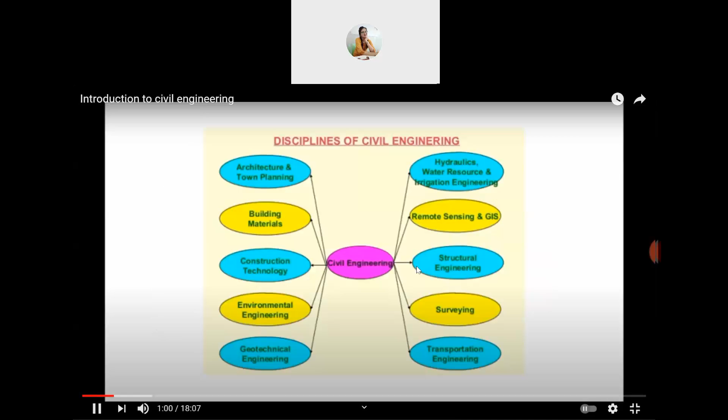These are the disciplines of civil engineering. The first one is architecture and town planning. What is the importance of architecture? Architecture gives beauty to buildings, enhances the appearance, and maintains heritage.

Town planning is now separated from civil engineering. Town planning includes planning the layout of the town, planning roads in different gridways, separating commercial, residential, academic and industrial areas, planning green belts, planning proper sewage and disposal units, and planning water treatment plants and water storage units. These are all included in town planning, which was once part of civil engineering but is now separated from it.

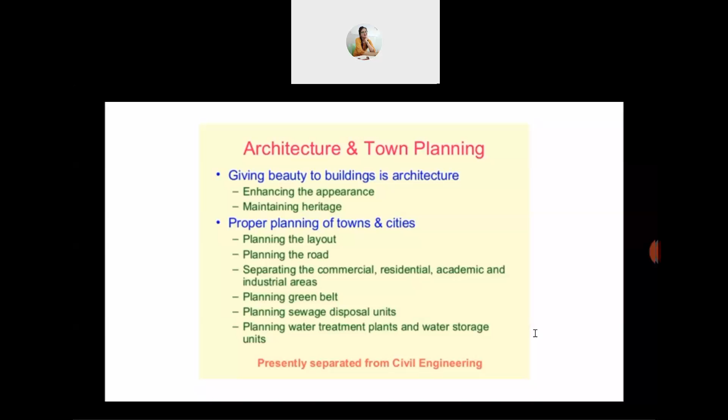Next is building materials and technology. What are building materials? They are the materials used for construction of buildings, such as bricks, tiles, soil, cement, stone, sand, steel, etc. These materials may be available naturally or be man-made. These days there are many new technologies and trends in the manufacturing process of building materials, and there are different varieties of building materials available today.

So what does building material technology deal with? It deals with the proper use of desired materials economically and safely. There are many materials available, but it's important to choose which one is desired, which is economical, and which is safe to use.

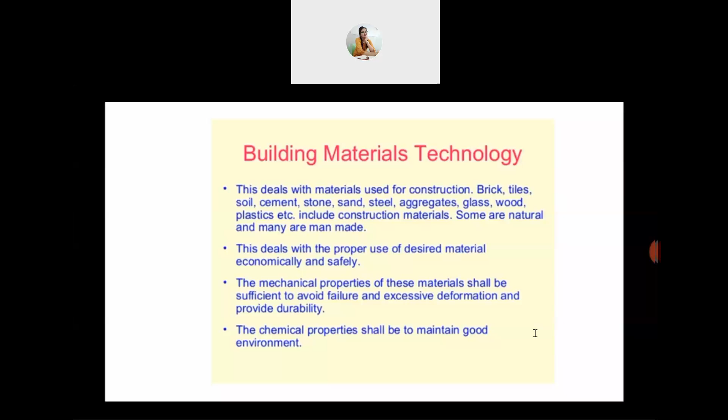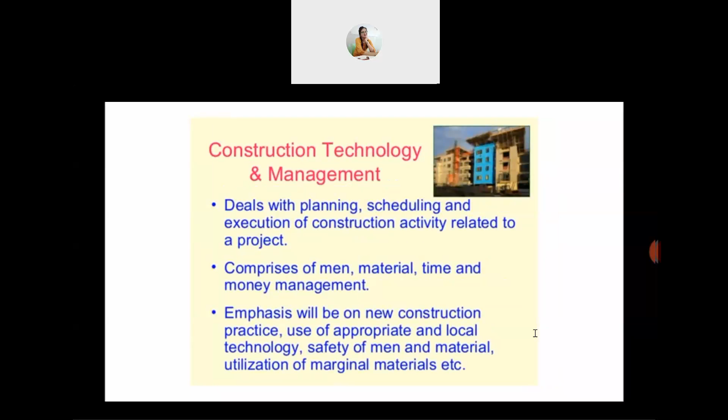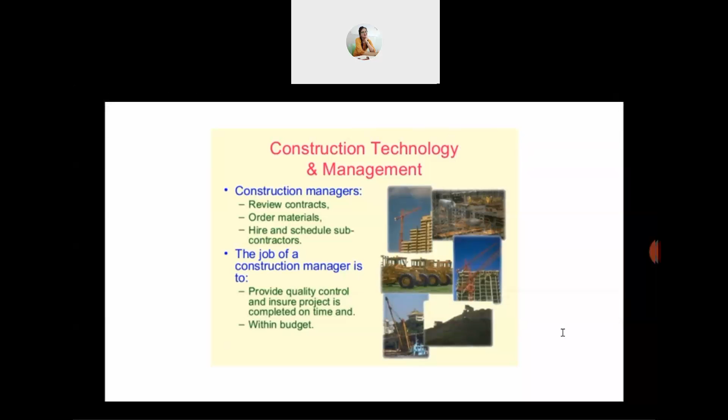Construction technology and management is a discipline that deals with planning, scheduling, and execution of construction activities related to a project. What exactly do construction managers do? They review contracts—a legal document—order materials, and hire and schedule sub-contractors. The job of a construction manager is to provide quality control and ensure the project is completed on time and within budget, since building materials should also be economical.

The next discipline is environmental engineering. Generally people think environmental engineering means the study of environment around us, but in civil engineering it actually deals with the technology to save nature from human and natural abuse and pollution. The study involves a balanced compromise between environment and safety.

It deals with the technique of water collection, purification, and supply—we need to supply drinking water that is potable. At the same time, wastewater collection: we need to collect waste from different buildings, whether commercial, industrial, or residential, and deal with how the waste is collected, treated, disposed of, or reused. It also deals with control of all types of pollution and solid waste management.

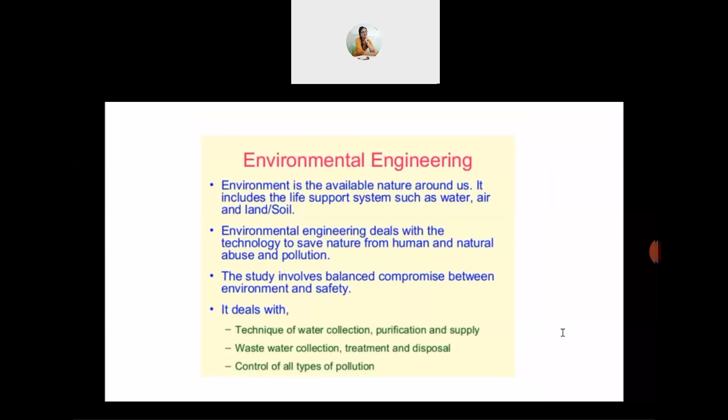So, environmentalist versus environmental engineer—these are different roles. The environmental engineer deals with the technique of water collection, purification, supply, wastewater collection, treatment, and disposal, whereas the environmentalist deals with all aspects of the environment.

Next discipline is geotechnical engineering. All structures are founded on ground, you know that. So what exactly geotechnical engineering involves is understanding the ground behavior, soil characteristics, and interaction between soil and structure. It involves foundations, slopes, retaining structures, highway pavement design, embankments, earth dams, tunnels, underground structures, etc.

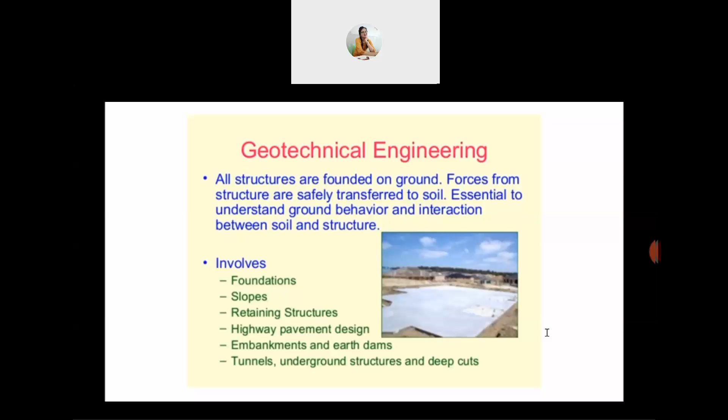So, do you know what exactly is a foundation? Foundation is a structure which takes the loads from superstructure and distributes them to the soil safely. It is a very important element of any structure. So in geotechnical engineering, we assess the quality of soil and rock to carry the structure. If the soil quality is not good, we either replace the soil or go for deep foundations. Proper knowledge of geotechnical engineering is very much necessary for safety and stability of structures.

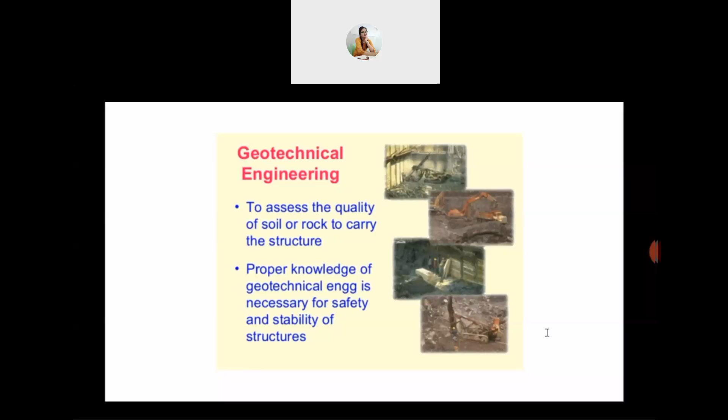Next is hydraulics, water resource and irrigation engineering. You know what is hydrology? Hydrology is the study of water. So what exactly does hydraulics deal with? Hydraulics deals with mechanics of water and fluid flow. Fluid may be water or any liquid.

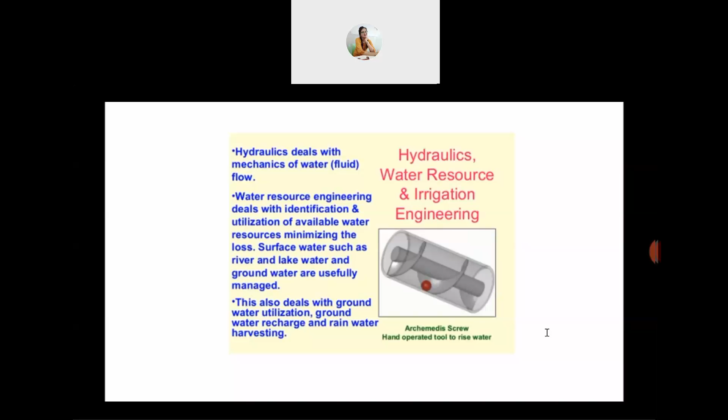So what exactly does water resource deal with? Water resource engineering deals with identification and utilization of available water. Irrigation, you know what irrigation engineering is? Engineering dealing with irrigation is called irrigation engineering. Groundwater utilization, groundwater recharge and rainwater harvesting all come under irrigation engineering.

Next is hydraulics, water resource and irrigation - this we have already discussed. Irrigation engineering deals with water management for agriculture purposes. There will be how water is distributed from the dam to the very field channel.

So what is a dam? Why are dams constructed? Where are dams constructed? Dams are constructed at desired locations to store water. We cannot construct a dam in between a town, right? We need to construct a dam where a river is flowing, and we need to store the water in a reservoir. We need to supply the same for drinking purposes, agricultural purposes, and many other water supply purposes.

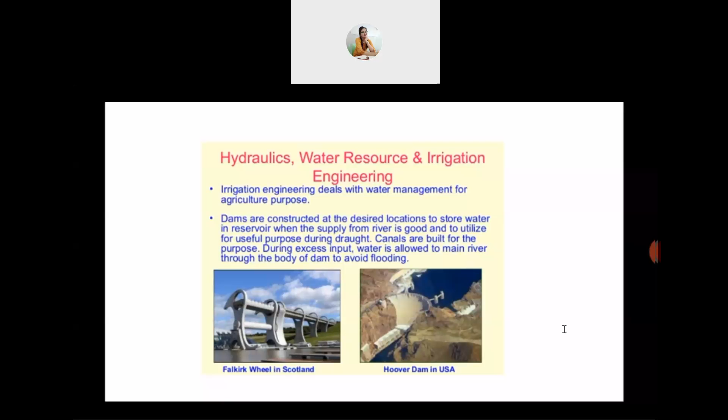So what exactly does water management involve? They deal with drainage systems, detention ponds, navigational waterways, etc.

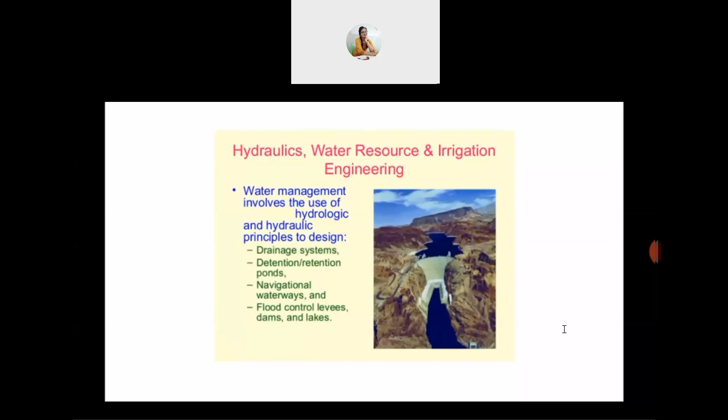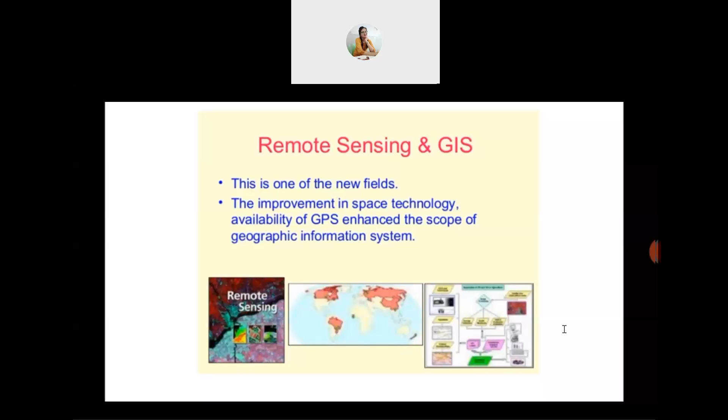Next is remote sensing and GIS. GIS is geographical information systems. These two are among the new fields. They deal with improvements in space technology - how we can collect data from space and satellites, how the data is collected from space, how it is processed, and how it is utilized by civil engineering. It all deals with the subject of remote sensing. So all the details I have given you in this slide.

Good mapping technique helps us to get required information accurately. You know what a map is? How it is useful? So all these things are included in this slide. Please go through this slide.

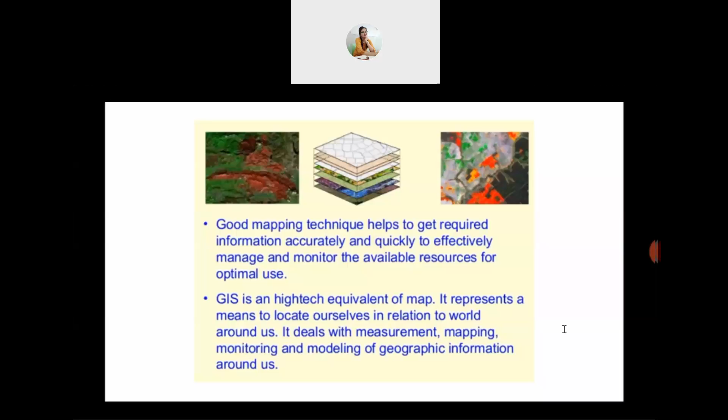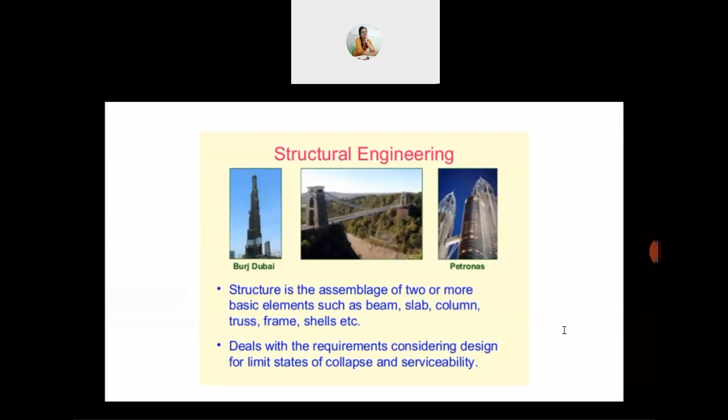Next discipline is structural engineering. What is a structure? A structure is a series of connected, interrelated elements that form together a system which can resist a series of external load effects applied to it.

Next discipline is surveying. Surveying in general is the art of determining relative positions of various points on the earth, above the earth, or below the earth. So what exactly do we do in surveying? We find the relative positions of various points. So how is it useful?

Surveying is useful in collection of data. So what kind of data do we collect? We collect data of topographic features of a location for future construction. They help us in preparing plans or maps in detail which may be used for construction purposes.

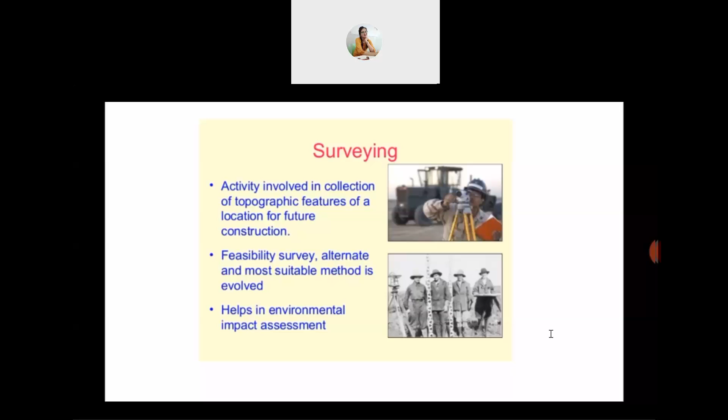Next is transportation engineering. So what exactly does transportation engineering deal with? It involves planning, designing, construction or operation, and maintenance of transportation facilities.

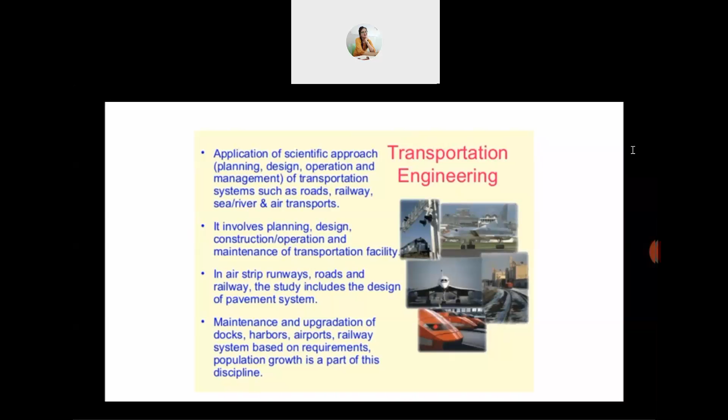So what is a road? You know what a road is, right? A road is an identifiable route, way or path between two or more places. Road is simply any pathway fit for riding.

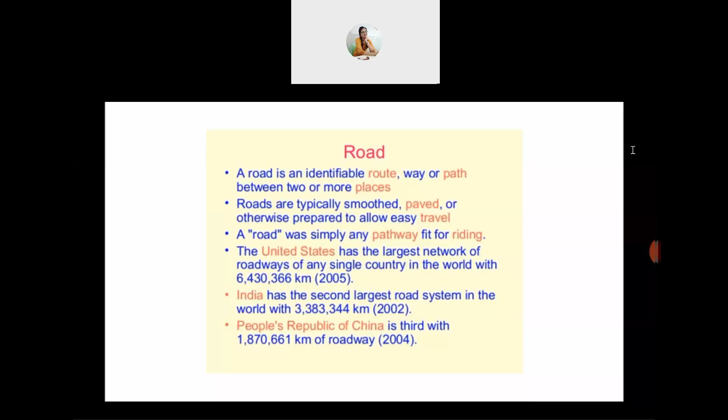Bridges - a bridge is a structure built to span. It is designed for trains, pedestrians, or road traffic, a pipeline, or a waterway for water transport or barge traffic.

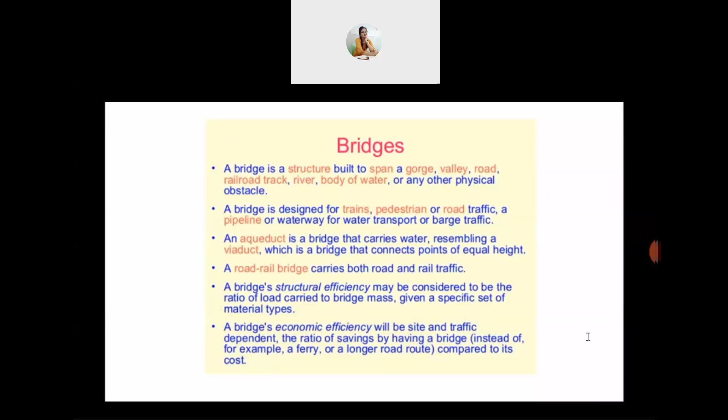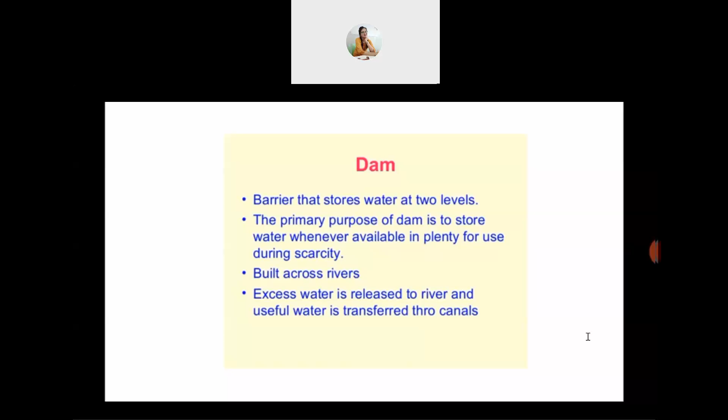Next is dam. You know what a dam is? I have already told you in my previous slides. Dam is a barrier that stores water at two levels. The primary purpose of a dam is to store water whenever available in plenty, for use during scarcity. That water can be used for drinking purposes, domestic purposes, and agricultural purposes.

Next discipline is infrastructure. So, do you know what exactly is infrastructure? Infrastructures are the structural elements that allow for the production of goods and services without themselves being part of the production process. Example: roads allow transportation of raw materials and finished products.

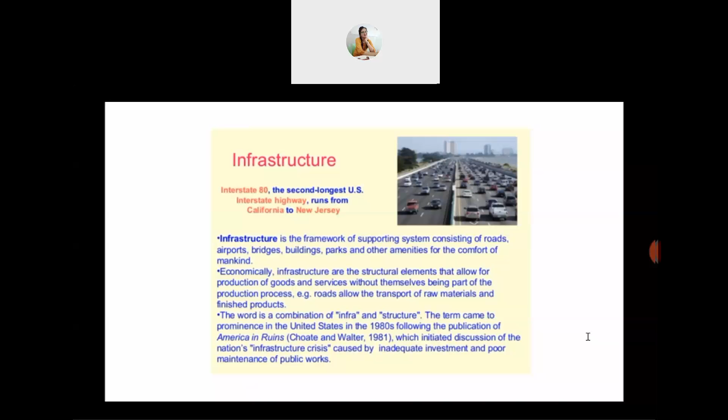So, what exactly infrastructure deals with is transportation. Transportation includes road network, railways, ports and harbors, air travel, and airports.

Second one is television network, which is also a means of communication. Telephone network includes landlines and mobile phones. Energy sector.

Electrification, use of renewable energy such as solar, wind, biogas plants. These are eco-friendly techniques.

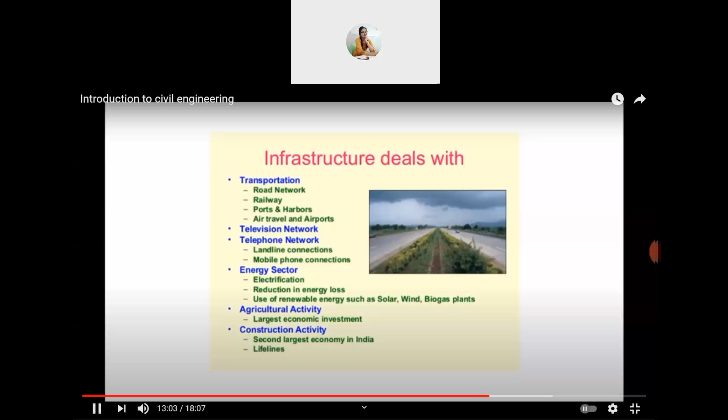So what exactly does a civil engineer do? He analyzes long range plans, survey reports, maps, and other data to plan and design projects. Without maps, we cannot plan or design projects. So he will collect all plans, survey reports, survey maps, and other data useful to plan and design projects.

He will also consider construction cost. I have already told you how cost plays an important role. For example, there are two bricks available: one costs 16 rupees and another costs 12 rupees. Which are you going to buy? When both give equal quality for the structure, definitely we'll go for lesser cost.

So he will be considering construction cost too, and we need to go for government regulations. There are many regulations given by the government which we need to follow. Potential environmental hazards—we cannot construct a building which will cause effect to the environment. So definitely we need to consider environmental hazards these days.

To reduce the impact of environmental pollution, we are going for green buildings, which are eco-friendly buildings. Whatever types of building materials we use, the disposal methods, the way we get electricity—all these methods use natural resources, recycled products, or eco-friendly materials in green buildings.

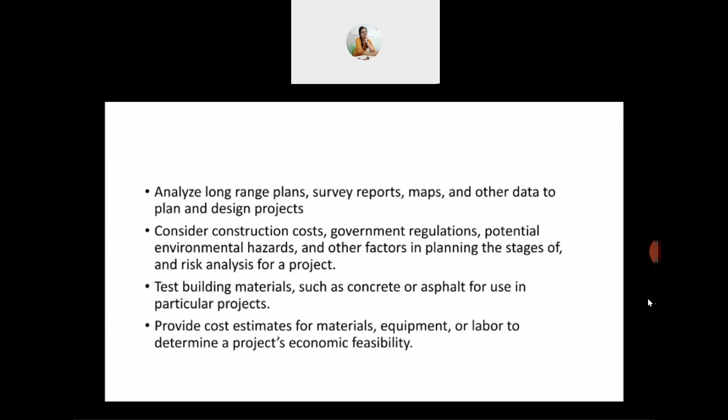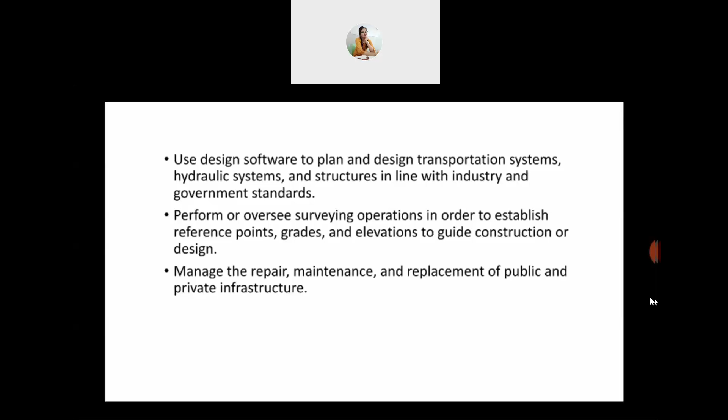So guys, this is about introduction to civil engineering and civil engineers. Civil engineering has a significant role in the life of every human being, though one may not truly sense its importance in our daily routine.

The function of civil engineering commences with the start of a day when we take a shower, since the water is delivered through a water supply system including a well designed network of pipes, water treatment plants, and other numerous associated services. So guys, this is my video about introduction to civil engineering and civil engineers.